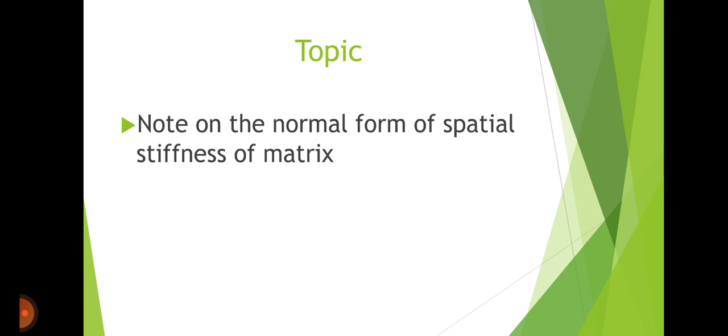Today my topic is a note on the normal form of the stiffness matrix. Outline: introduction, procedure, properties, type of support.

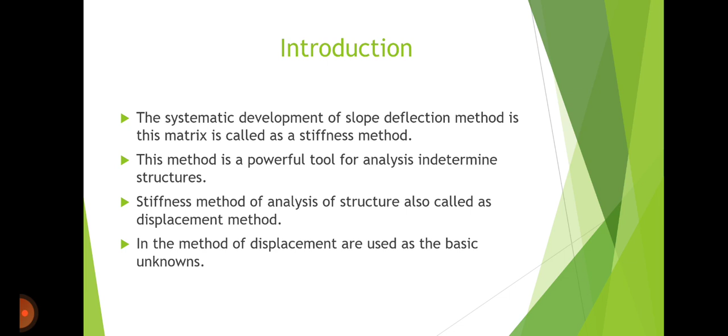Introduction. The systematic development of the slope deflection method in matrix form is called the stiffness matrix method. This method is a powerful tool for analyzing indeterminate structures. The stiffness method of analysis of structures is also called the displacement method. In this method, displacements are used as the basic unknowns.

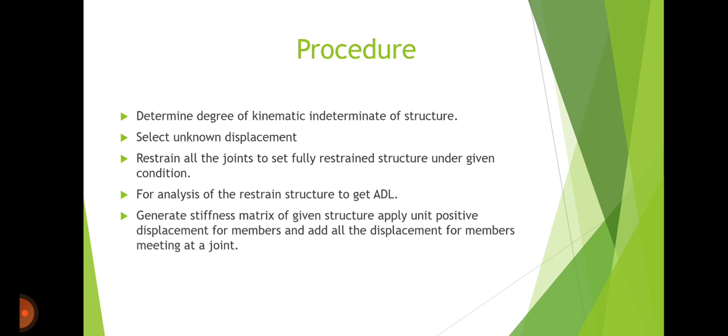Procedure. Determine the degree of kinematic indeterminacy of the structure. Select unknown displacements. Restrain all the joints to get a fully restrained structure under the given condition. For analysis of the restrained structure to get ADL, generate the stiffness matrix of the given structure. Apply unit positive displacement for members and add all the displacements for members meeting at a joint.

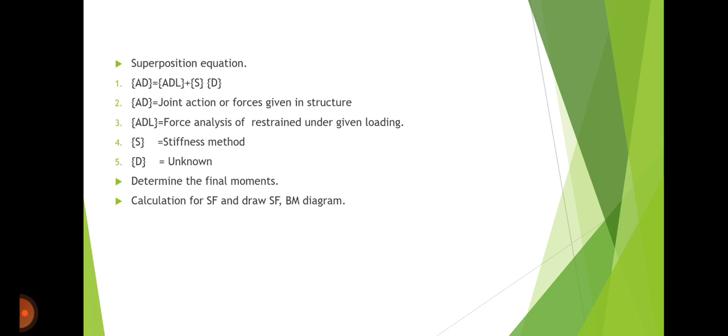Superposition equation: AD equals ADL plus S into D. AD equals the joint action or force given in the structure. ADL is the force from analysis of the restrained structure under the given loading. S is the stiffness matrix. D is the unknown. Determine the final moment, calculate the SF, and draw the SFD and BMD diagrams.

Properties of the stiffness matrix. The stiffness matrix is a square matrix of order n into n, where n is equal to DKI. The stiffness matrix is a symmetrical matrix, hence Sij equals Sji. Sii represents actions due to unit positive displacement while other displacements are zero. Sii is the principal diagonal element.

The stiffness matrix does not exist for an unstable structure. The stiffness matrix is a non-singular matrix. S is not equal to 0 for a stable structure. Sij is the action at joint i due to unit value of displacement at joint j.

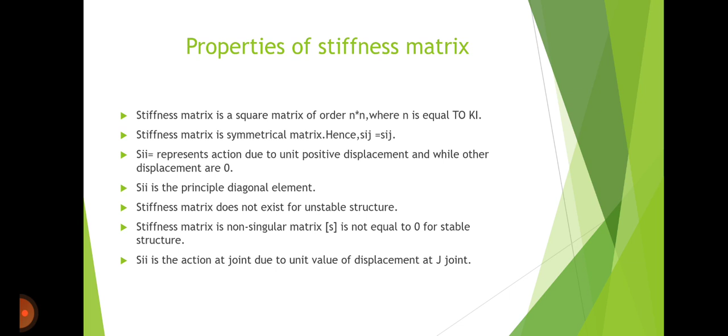Global stiffness matrix. Assembly of the global stiffness matrix of the entire frame: after computation of the global stiffness matrix K of i of the members, the next step is the assembly of the global stiffness matrix of the entire structure. In the previous cases examined, the aforementioned matrix resulted from the assembly of the global stiffness matrix of the structural members, and more specifically from their submatrices corresponding to their end nodes.

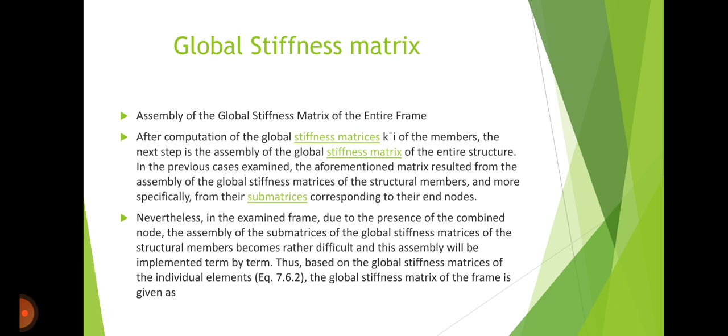Nevertheless, in the examined frame, due to the presence of a combined node, the assembly of the submatrices of the global stiffness matrix of the structural members becomes rather difficult, and this assembly will be implemented term by term. Thus, based on the global stiffness matrix of the individual element, equation 7.6.2, the global stiffness matrix of the frame is given in the table below.

Static condensation method. Assembly of the global stiffness matrix of the entire frame according to modeling consideration. After computation of the global stiffness matrix K of i of each member, the next step in the analysis is the assembly of the global stiffness matrix of the entire structure. This assembly, similarly to analysis step E of consideration I, will be implemented on a stiffness term by term basis.

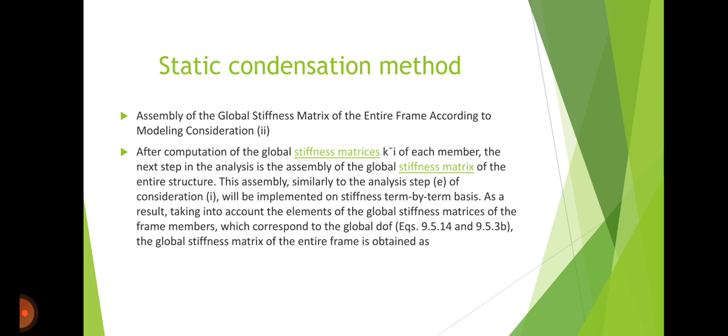As a result, taking into account the elements of the global stiffness matrix of the frame members which correspond to the global DOF, equations 9.5.14 and 9.5.3b, the global stiffness matrix of the entire frame is obtained as in the table. Fundamentals for finite element method.

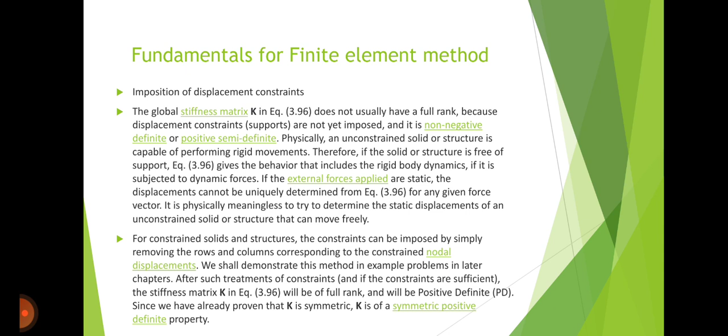Internal hinges and modified stiffness matrix method. Assembly of global stiffness matrix of entire frame. After computation of global stiffness matrix Ki of frame member, the next step in the analysis is the assembly of global stiffness matrix of the entire structure.

In the previous examined example, the aforementioned matrix resulted from the synthesis of global stiffness matrix of structure members, and more specifically of submatrix of member end nodes of this matrix. In the examined frame, however, due to the presence of internal release roller at node 2, the assembly of submatrix of the global stiffness matrix of the members becomes more cumbersome and it is more convenient to implement the term by term procedure of section 7.6.

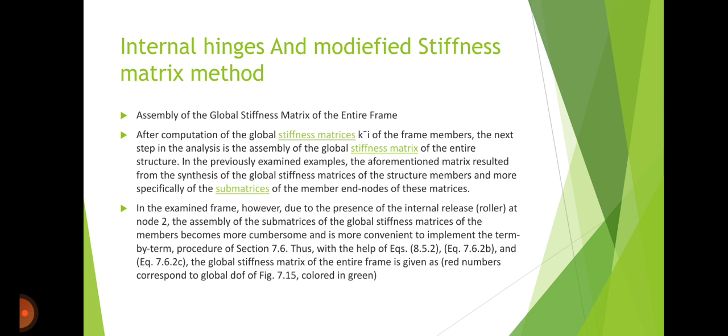Thus, with the help of equations 8.5.2, equation 7.6.2b, and equation 7.6.2c, the global stiffness matrix of entire frame is given; red numbers correspond to global DOF of figure 7.15 colored in green. The table shows the given statements: assembly of element matrix and vectors and derivation of system equation.

Assemblage of element equation. Once the element characteristics, namely the element matrix and element vectors, are found in a common global coordinate system, the next step is to construct the overall or system equation. The procedure for constructing the system equation from the element characteristics is the same regardless of type of problems and the number and the type of elements used.

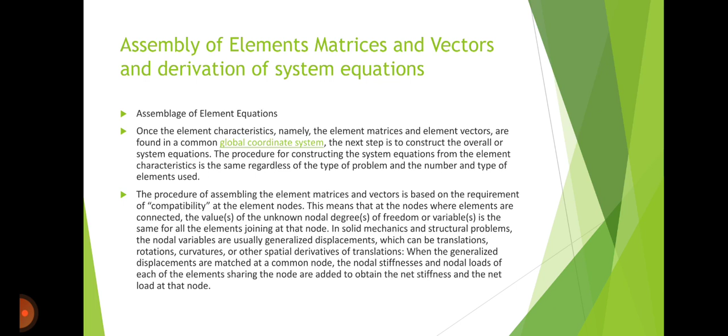The procedure of assembling the element matrix and vectors is based on the requirement of compatibility at the element nodes. This means that at the node where elements are connected, the values of nodal degrees of freedom or nodal variables are the same. The nodal variables are usually generalized displacements, which can be translations, rotations, curvatures, or other spatial derivatives of translation. When the generalized displacements are matched at a common node, the nodal stiffness and nodal loads of each of elements sharing the node are added to obtain the net stiffness and the net load at that node.

Let E and M denote the total number of elements and nodal degrees of freedom, including the boundary and restrained degrees of freedom, respectively. Let phi denote the vector of M nodal degrees of freedom, and K the assembled system characteristic matrix of order M by M. Since the element characteristic matrix K of e and the element characteristic vector P of e are of order n by n and n by 1 respectively, with n indicating the number of element degrees of freedom, they can be expanded to the order M by M and M by 1 respectively by including zeros in the remaining locations. Thus, the global characteristic matrix and the global characteristic vectors can be obtained by algebraic addition.

As in equation 6.9, K equals the sum over e equals 1 to E of K of e, where K of e is the expanded characteristic matrix of element e of order M by M, and P of e is the expanded characteristic vector of element e of order M by 1. Even if the assemblage contains many different types of elements, equations 6.9 and 6.10 will be valid, although the number of element degrees of freedom n changes from element to element.

In actual computation, the expansion of the element matrix K of e and vector P of e to the sizes of overall K and P is not necessary; they can be generated by identifying the locations of the elements of K of e and P of e in K and P respectively, and by adding them to the existing values as e changes from 1 to E.

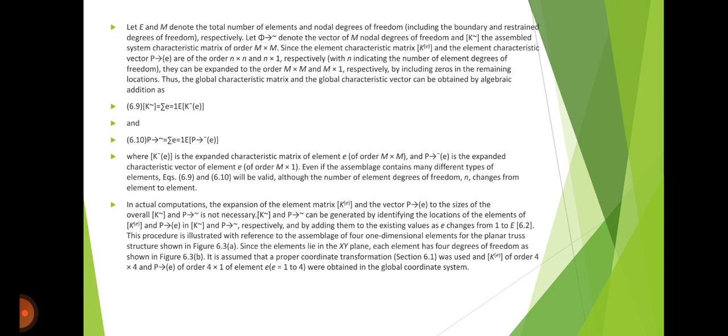This procedure is illustrated with reference to the assemblage of four one-dimensional elements for the planar truss structure shown in figure 6.3a. Since the elements lie in the xy plane, each element has 4 degrees of freedom as shown in figure 6.3b. It is assumed that a proper coordinate transformation, section 6.1, was used and K of e of order 4 by 4 and P of e of order 4 by 1 of elements e equals 1 to 4 were obtained in the global coordinate system. Planar truss as an assembly of one-dimensional elements.

For assembling K of e and P of e, we consider the elements one after another. For e equals 1, the element stiffness matrix and the element load vector P of 1 can be written as shown in table 6.1.

The location row l and column m of any component Kij1 in the global stiffness matrix is identified by the global degrees of freedom phi l and phi m corresponding to the local degrees of freedom phi i of 1 and phi j of 1 respectively. For i equals 1 to 4 and j equals 1 to 4, the correspondence between phi l and phi i of 1 and that between phi m and phi j of 1 is also shown in table 6.1. Thus, the location of components Kij1 in K will be shown in table 6.2.

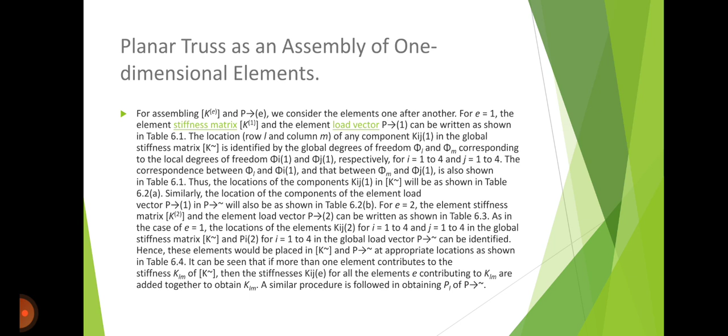Application of spatial matrix: introduction. The main role of spatial weights is their use as the basis for construction of various tests for spatial autocorrelation. These measures consist of a compromise between attribute similarity and locational similarity, with the latter formally expressed through the spatial weights. However, the weights are also important for the creation of spatially explicit variables. These are variables that take into account the values observed at neighbor locations.

There are two important applications for this. One pertains to the construction of so-called spatially lagged variables for inclusion in a spatial regression specification. The other yields an approach to smooth rates by borrowing strength from the values in neighboring observations. This takes the form of spatially smoothed rates. We consider each in turn.

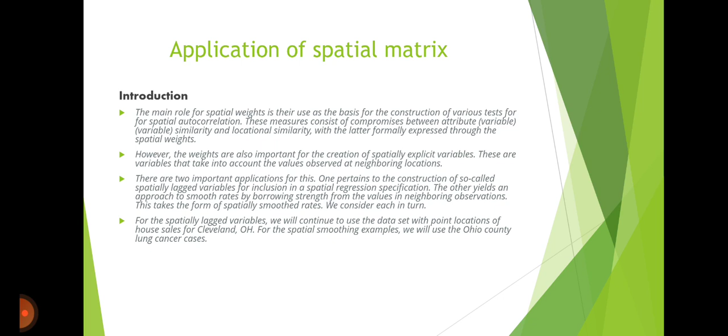For the spatially lagged variables, we will continue to use the data set with point locations of house sales for Cleveland, OH. For the spatial smoothing examples, we will use the Ohio county lung cancer cases. Objectives: create a spatially lagged variable as an average or sum of neighbors. Create a spatially lagged variable as a window sum or average. Create a spatially lagged variable based on inverse distance weights. Create a spatially lagged variable based on kernel weights.

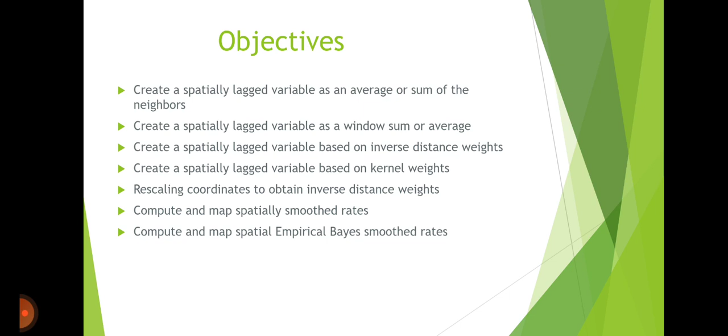Rescaling coordinates to obtain inverse distance weights. Compute and map spatially smoothed rates. Compute and map spatial empirical Bayes smoothed rates. Getting started. To start, we continue to use the data set that contains the location and sales price of 205 homes in a core area of Cleveland, OH, for the fourth quarter of 2015. We also need to have several spatial weights active in the weights manager. At the very least, we need k nearest neighbor weights for k equals 6.

Inverse distance weights using the k nearest neighbors with k equals 6, and Epanechnikov kernel weights, again using the adaptive kernel for k equals 6 nearest neighbors and with the kernel applied to the diagonal weights. The diagonals will thus equal 0.75. We can either create these weights in the current project after dropping the file clev_sls_154_core.shp into the drop files rectangle of the connect to data source dialog, or load a project file that contains the weights.